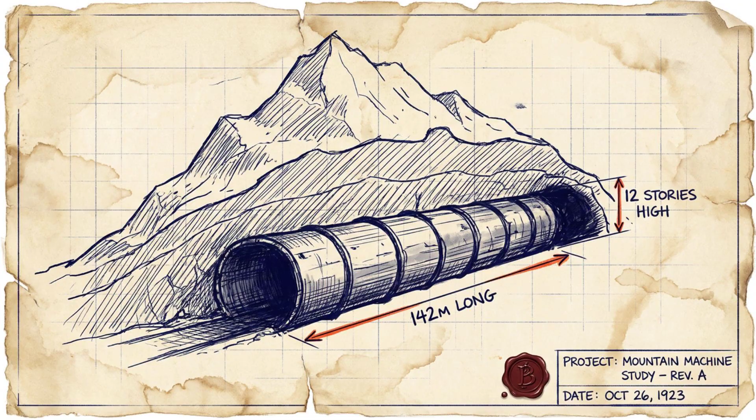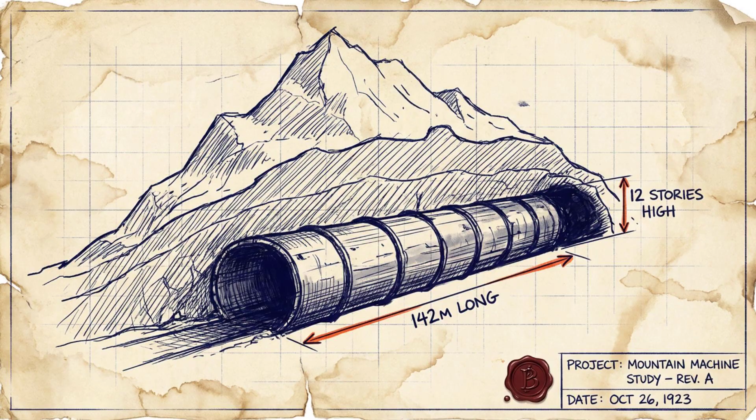Picture a machine the size of a 12-story skyscraper, laid on its side, buried under a mountain. It can't go forward, can't go backward, and it's supposed to be powering Australia's entire energy transition. That's not a hypothetical, that's what happened. This is the story of TBM Florence and the engineers who had to reinvent the Earth itself to get her back.

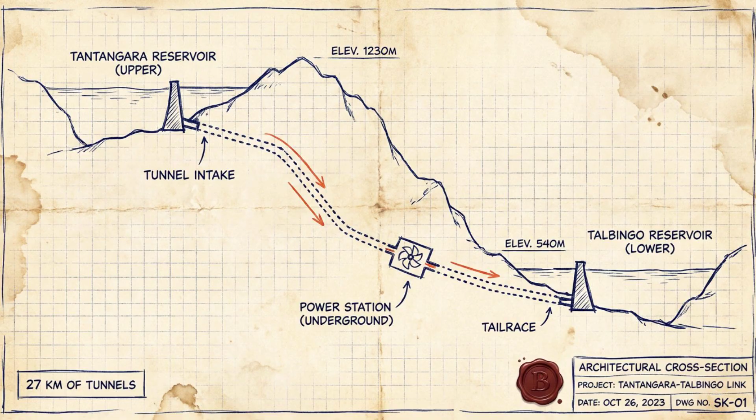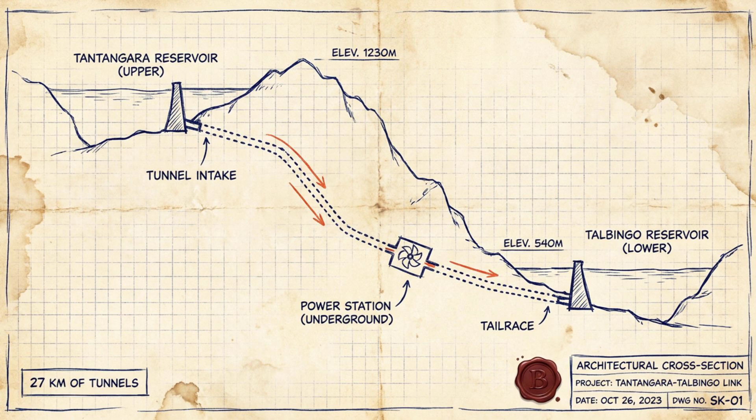The backstory first. Australia is building something that sounds almost too elegant, a gravitational battery. An actual gravitational battery. Snowy 2.0 pumps water up to an elevated reservoir when electricity is cheap, then releases it back down through turbines when the grid needs power. 27 kilometers of tunnels through the Australian Alps, enough stored energy to power 3 million homes for a week. The whole thing stands or falls on the machines that dig those tunnels.

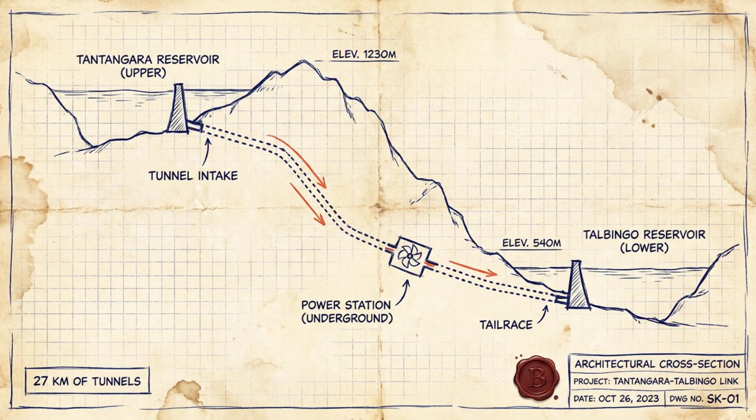And one of those machines went underground and couldn't come back. Before we go underground with Florence, we need to go back, way back, 530 years before the birth of Christ. The island of Samos, Greece. A small city is dying of thirst. Its only fresh water source is on the wrong side of a limestone mountain.

The tyrant Polycrates needs a solution. He hires an engineer, a man named Eupalinos of Megara. And Eupalinos proposes something audacious. He's going to dig a tunnel through the mountain, 1,036 meters, through solid limestone. No explosives, no powered machinery, iron picks, fire, and time.

But that's not the remarkable part. Eupalinos decides to dig from both ends at once. Two teams, opposite faces of the mountain, boring toward each other in total darkness. No GPS, no radio, no electronic surveying, just geometry and the courage to trust it.

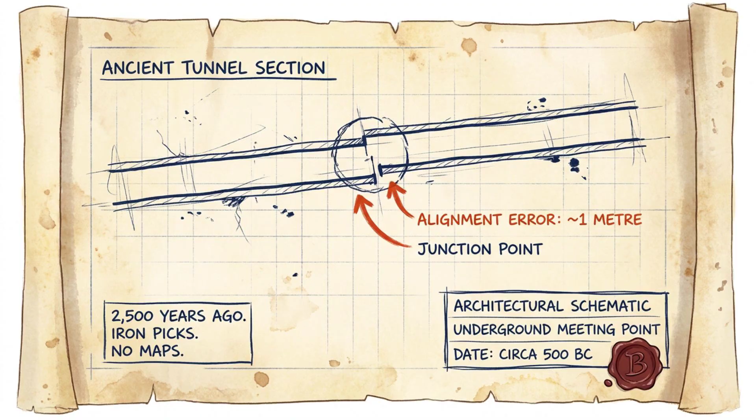Eupalinos walked equal horizontal distances around the mountain slopes, set reference markers, calculated the angles by hand, told both teams exactly where to dig. 2,500 years later, you can still walk through that tunnel. The two teams met within approximately 1 meter of each other, 1 meter of alignment error, across more than a kilometer of solid rock, with iron picks in the dark.

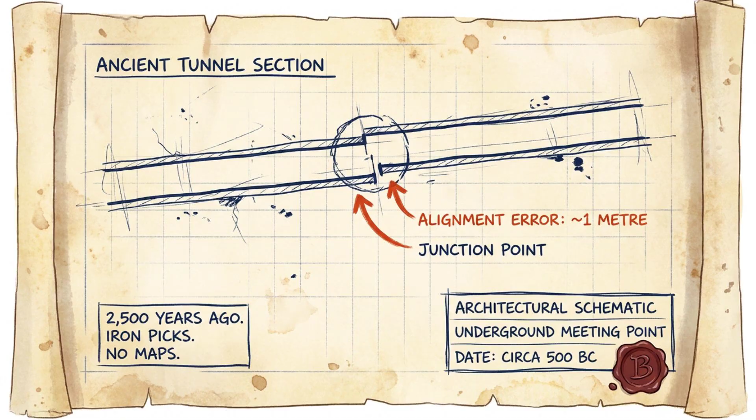That tunnel is still there today. The Eupalinos Tunnel, Samos, a UNESCO World Heritage Site, and a blueprint, literally, for what happens when you run out of options underground. There's another thing ancient miners did that gets almost no attention.

When the rock face was too hard to chip, they didn't force it. They built fires against the tunnel wall, big fires, let the rock heat through, then threw cold water on it. The thermal shock cracked the rock from within. The material itself changed, not because they overpowered it, because they altered its physical state first, then cut through.

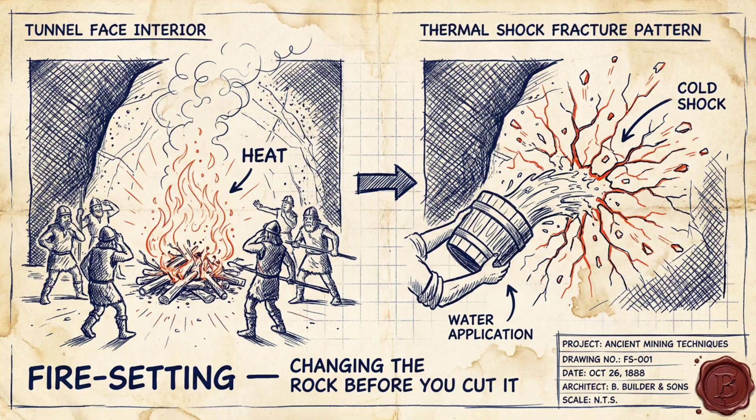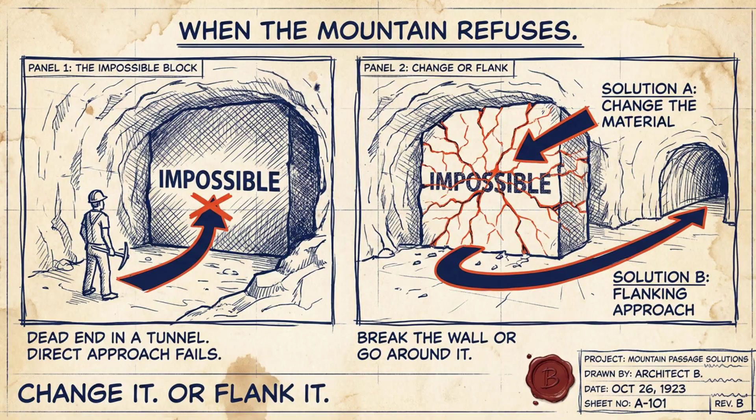That technique is at least 2,000 years old. You're about to see engineers use the exact same principle with slightly different equipment. So here's the principle at the heart of this episode. When the Earth refuses to yield, you have two choices: change the Earth first, then advance, or send the second team from the opposite direction. Eupalinos did both. 2,500 years later, engineers in the Australian Alps would face the same problem, with a machine weighing 2,000 tons and an entire country's energy grid depending on the answer.

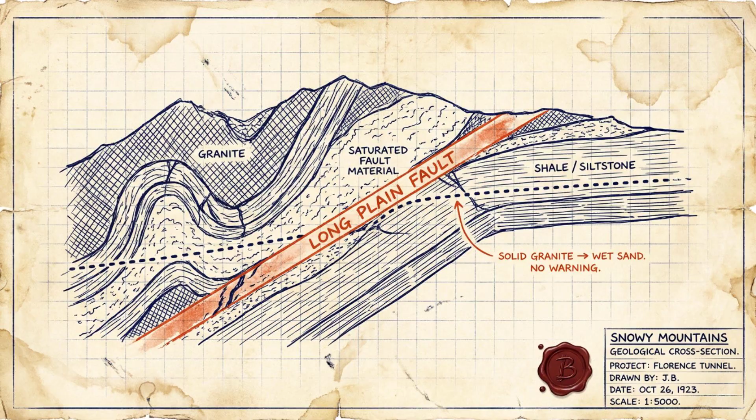The Snowy Mountains are not friendly geology. The rock under Kosciuszko National Park isn't a neat layer cake, it's chaotic. Millions of years of tectonic stress have broken it into shale, siltstone, and fractured sandstone, saturated with groundwater, compressed, folded, unpredictable. And running right through the planned tunnel route, the Long Plain Fault Zone, a geological boundary where solid granite can transition without any warning at all into something that behaves more like wet sand. The surveys didn't fully detect it. Florence would find it the hard way.

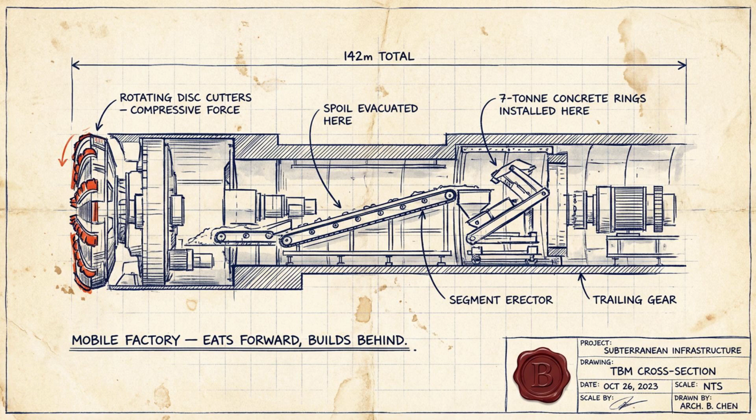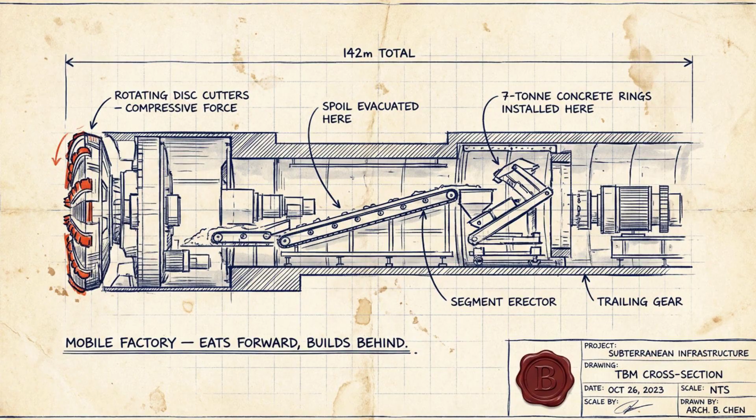To understand why that matters, you need to understand what a TBM actually is. It's not a drill, it's a self-contained mobile factory. The cutter head at the front spins and fractures the rock through sheer compressive force. Dozens of steel disc cutters, enormous hydraulic pressure. The excavated material, the spoil, gets swallowed and conveyed out the back on a continuous belt. At the same time, in the rear section of the machine, robots position the permanent tunnel lining, concrete segments, 7 tons each, 9 segments per ring. The machine eats forward and builds behind itself simultaneously.

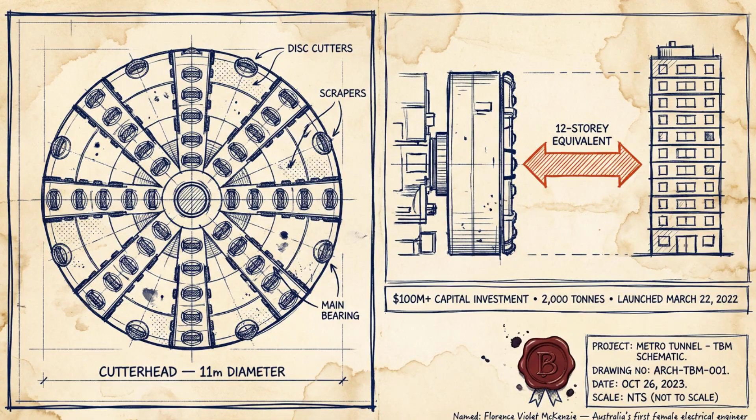Florence was designed to advance 30 to 50 meters per day. Florence herself is extraordinary, named after Florence Violet McKenzie, Australia's first female electrical engineer, 142 meters long, 11 meters in diameter. If you stood her on her cutter head, she'd be the height of a 12-story building. Over 2,000 tons of steel, hydraulics, and sensors, more than $100 million of machine. Her mission, 15 kilometers of tunnel through the heart of the Australian Alps. She launched with considerable fanfare on March 22, 2022.

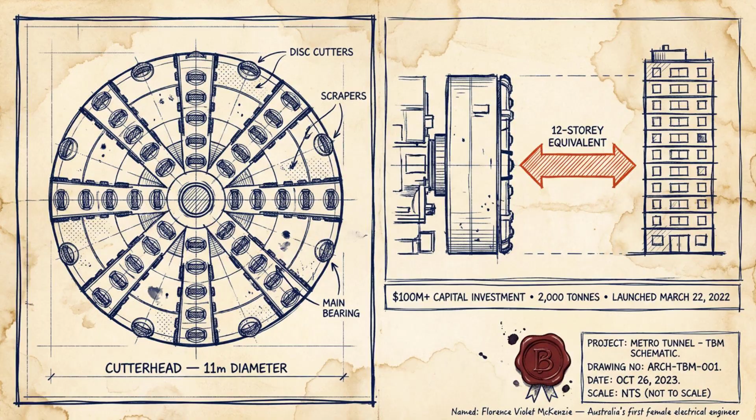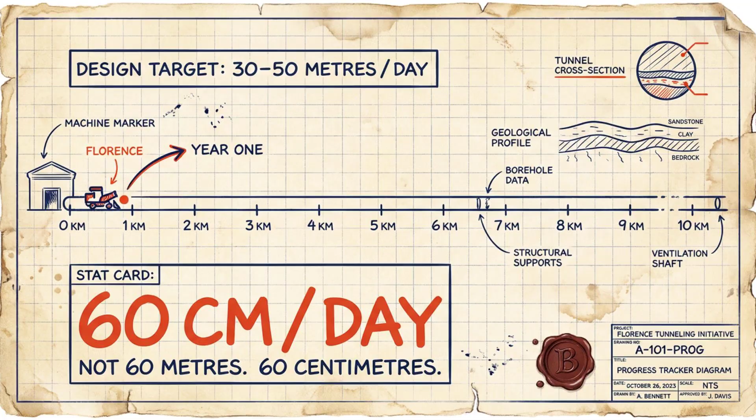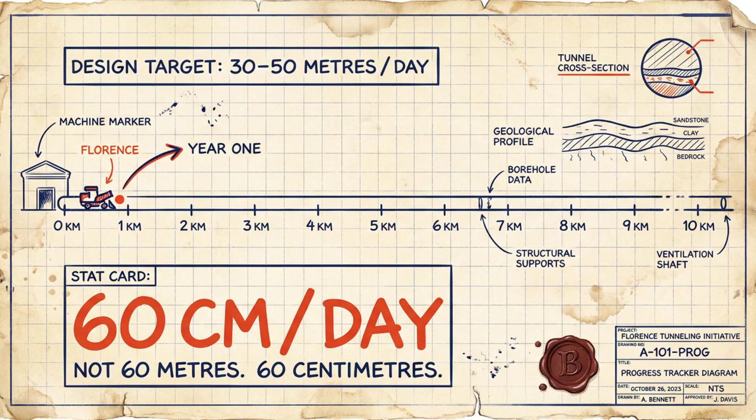Nobody was prepared for what came next. Within weeks of that launch, something was wrong. Florence was meant to advance 30 to 50 meters a day. Instead, 60 centimeters - not 60 meters, 60 centimeters - for an entire year. The long plain fault zone was far more unstable than any preliminary borehole survey had mapped. The machine was slowing to almost nothing, and the geological situation was about to get much worse.

December 2022. Florence had advanced exactly 145.8 meters into her 15-kilometer drive. That's not a typo - 145 meters out of 15,000. The ground ahead wasn't rock. It was saturated, sandy fault material under enormous hydrostatic pressure, and it was flowing into the cutter head chamber faster than Florence could manage it.

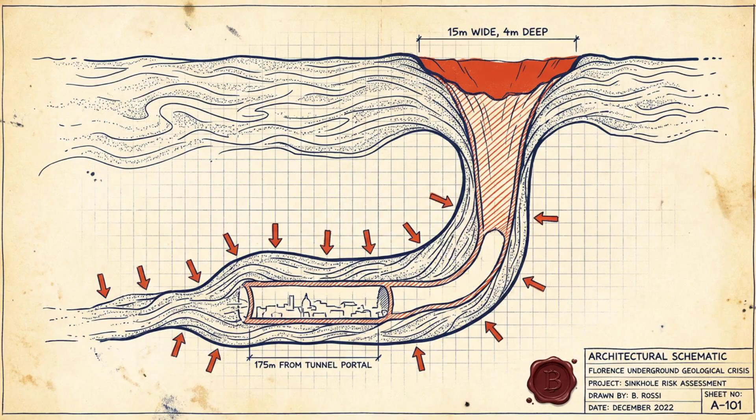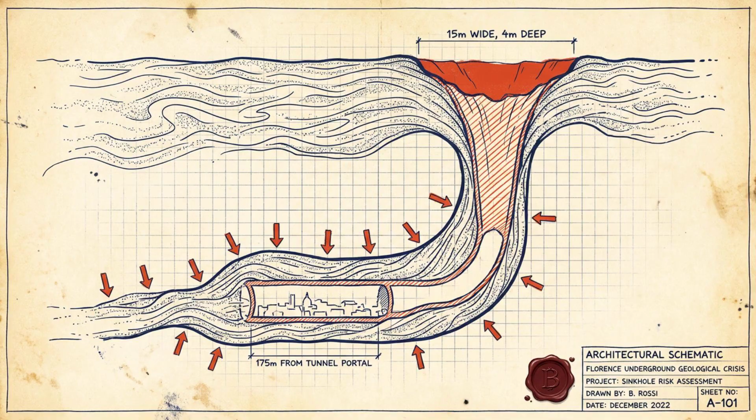The earth vacuumed upward. A 15-meter wide, 4-meter deep sinkhole opened on the surface in Kosciuszko National Park, 175 meters from where Florence had entered the mountain. Florence couldn't move, forward or back. 2,000 tons, pinned. There's no tow truck for a 2,000-ton machine buried under a mountain. Can't winch it out, can't dig down from the surface and lift it.

The saturated material had collapsed around Florence's hull. The friction alone - that soil gripping every centimeter of the outer shield - exceeded the machine's total hydraulic thrust. She couldn't push through it, couldn't reverse out of it.

For 12 months, engineers worked on the problem, and eventually they came to a conclusion that sounds like something out of a science fiction film. They couldn't fight the mountain, they had to change it.

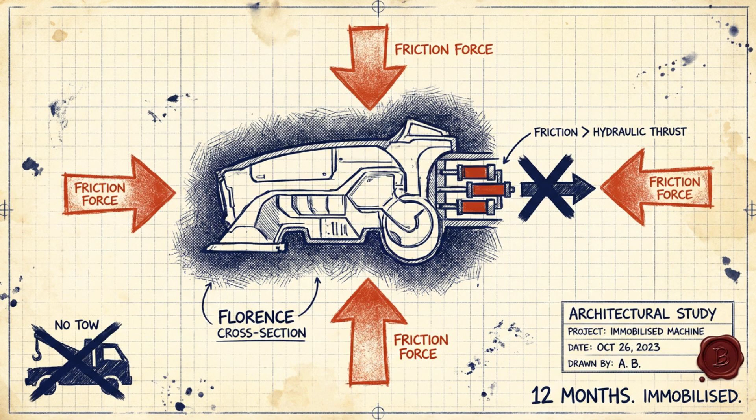What they did next is one of the most elegant engineering solutions I've come across. We're going in. This is where Eupalinos shows up again: prepare the ground first, then cut.

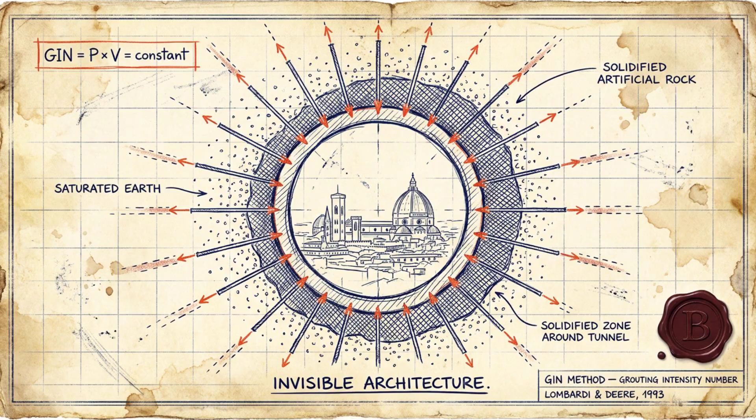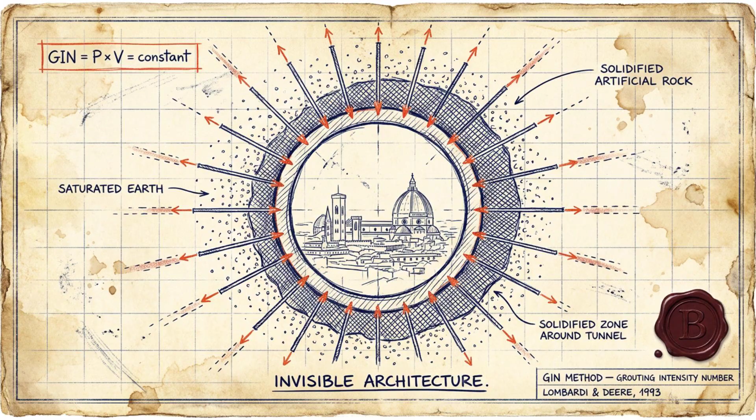Engineers deployed something called the GIN method, the grouting intensity number, developed in 1993 by geotechnical engineers Lombardi and Deere. The idea: drill injection holes around the machine and pump high-pressure liquid cement into the surrounding earth. Thousands of micro-injections, precisely controlled. The cement permeates every crack, every void, every saturated pore space. As it cures, the swamp becomes rock.

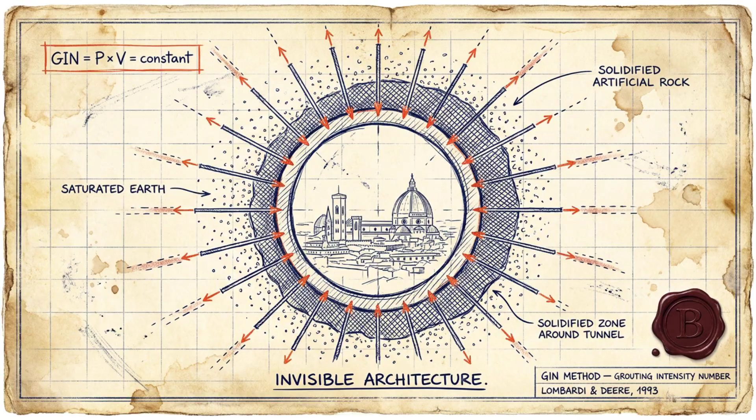Engineers were constructing a shell of artificial stone around Florence, inside a mountain. They called it invisible architecture, and that's exactly what it was. The physics had to be exactly right. Too little pressure, the cement doesn't reach the problem zones. Too much, you hydrojack the ground, violently crack open new fractures, make everything worse.

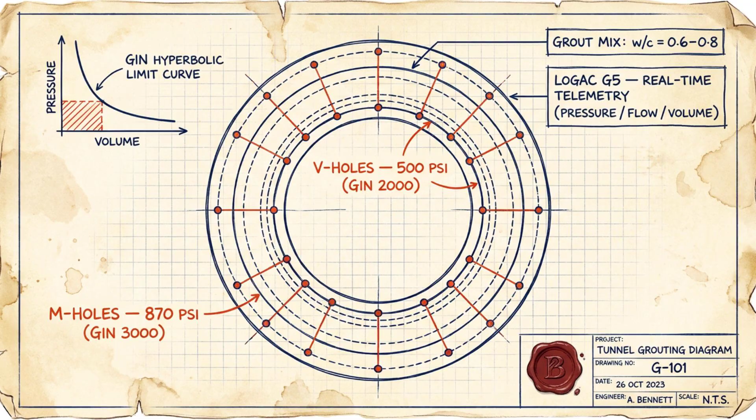The GIN method solves this with a constant mathematical product of pressure and volume injected. Two zones got different treatment: perimeter zones, the liner interface, 500 pounds per square inch; deeper mass consolidation zones, 870 pounds per square inch. One stable grout mix throughout, water to cement ratio between 0.6 and 0.8, tight enough to bond, stable enough not to segregate.

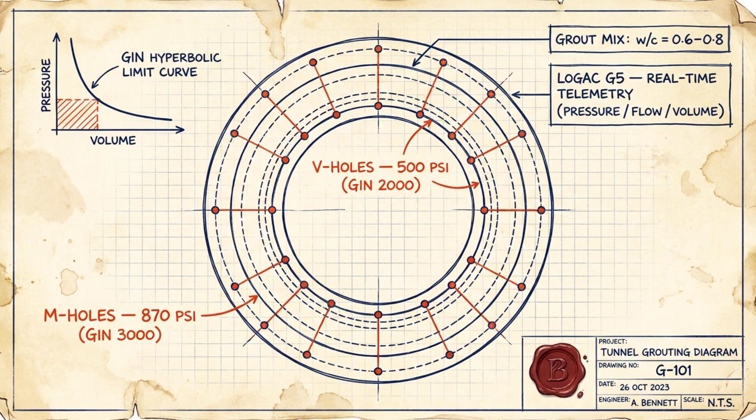Real-time monitoring from a LOGAC G5 recorder deep underground tracked pressure, flow rate, volume, penetration. The invisible architecture was being built by data as much as cement.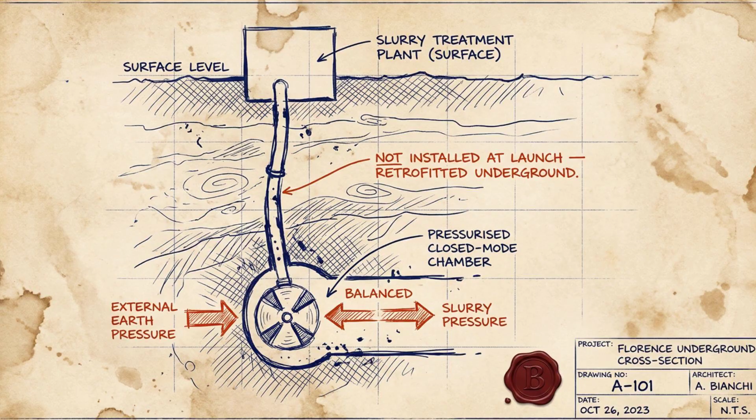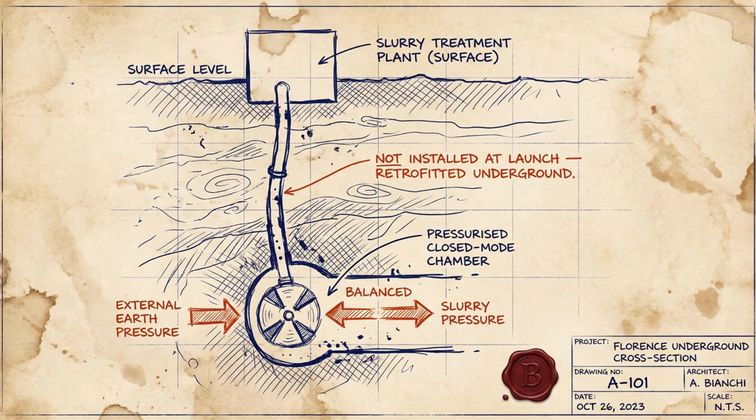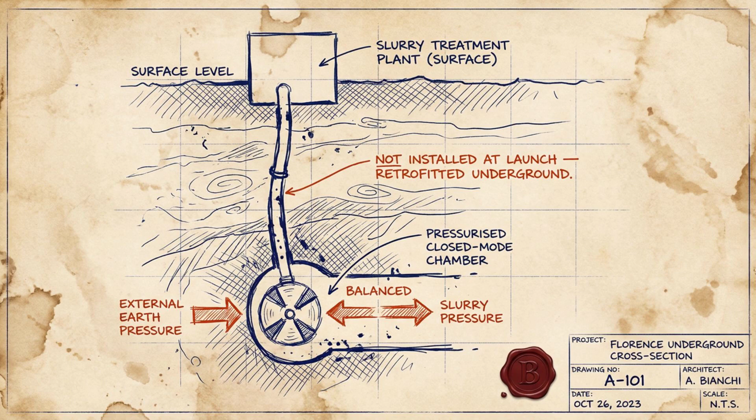But there was something that should have been caught earlier. Florence was dispatched without fully commissioned closed-mode slurry capability into geology that was known to carry unstable, water-saturated fault zones. During the rescue period, engineers had to build a new slurry treatment plant on the surface, run a feed pipe underground, and modify Florence herself. The slurry system works by pressurizing the cutter head chamber with viscous fluid matching the groundwater pressure outside - that balanced pressure stops the earth from flowing in. The modification took months on top of the grouting work, but by December 2023, Florence was ready.

December 2023, 12 months after the sinkhole, Florence takes her first step - slow, cautious, slurry mode fully engaged, but moving. The invisible architecture held. The engineers had changed the earth, and the earth obeyed. For a moment, it felt like the worst was over.

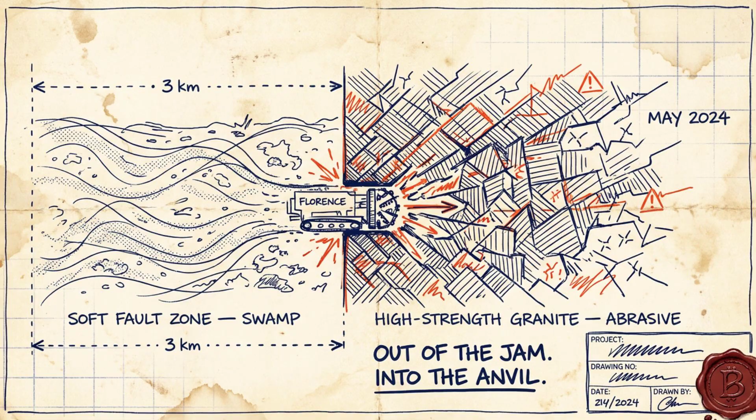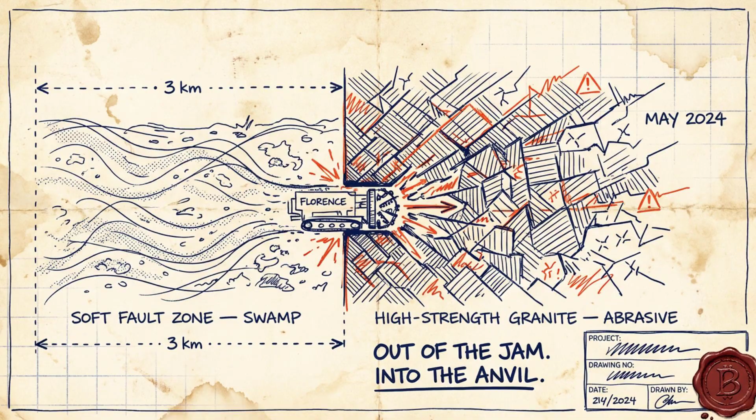By mid-2024, Florence had ground her way to 3 kilometers - 3 kilometers of slow, claustrophobic progress through the fault zone. Then the geology swung the other direction completely. Instead of saturated sandy ground, Florence drove into rock that was the opposite extreme: hard, aggressively abrasive, high-strength granite.

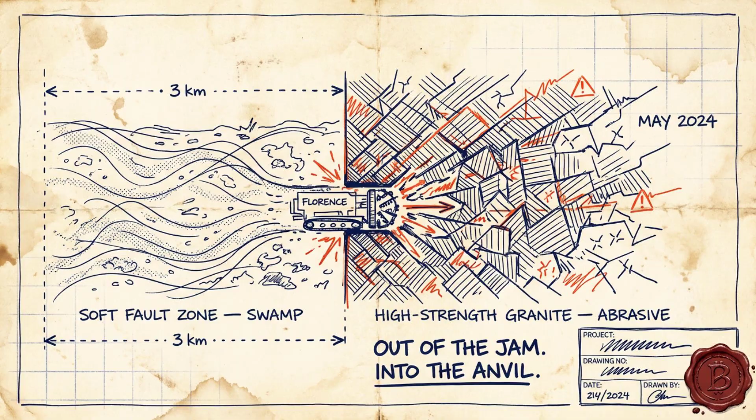And at exactly this point in the tunnel, the alignment required Florence to navigate a curve. Abrasive rock plus a tight curve plus immense hydraulic thrust - the rock began to clamp onto Florence's outer shield. May 15th, 2024. Total halt. Again. Here's the problem with the hard rock jam.

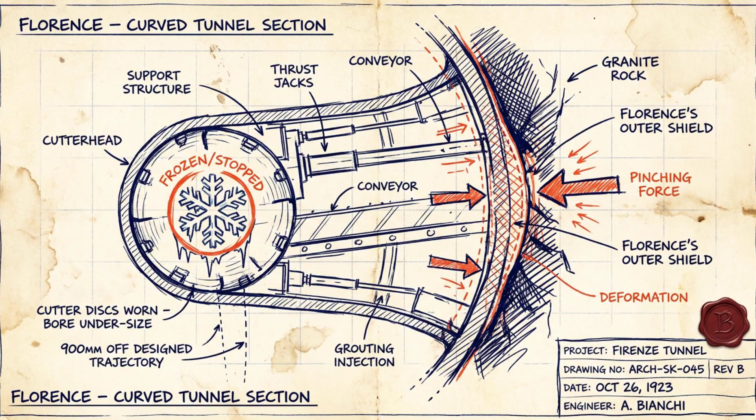The jam method can't help against solid granite. You can't inject cement into dense rock. Compounding things, the worn cutter disc had degraded the bore to a slightly smaller diameter than designed. The 7-ton concrete lining segments no longer fit correctly. Under the operational pressure to recover lost time, Florence had been driven approximately 900 millimeters off her design trajectory before she seized entirely. The rock was physically impinging on the outer shield.

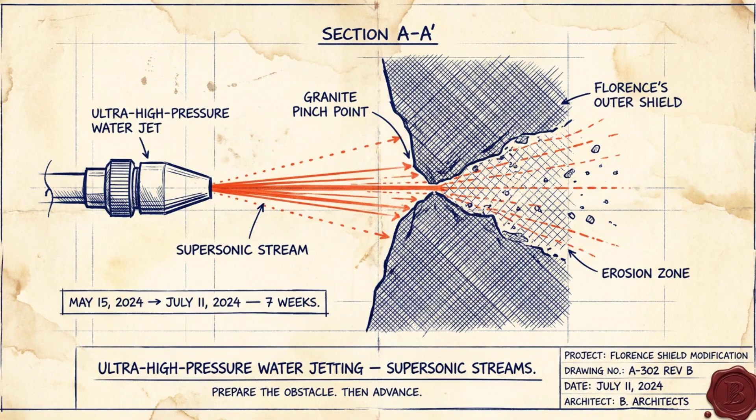It had to be removed without the cutter head, which was frozen, without damaging the hull. Millimeter by millimeter, specialist contractors deployed ultra-high pressure water jetting, hydroblasting, supersonic streams of water precisely targeted at the pinch points around the shield, not cracking the granite, dissolving it particle by particle. The same underlying principle as the ancient fire setter: you don't overpower the obstacle, you change its state, then you advance. Seven weeks of that process.

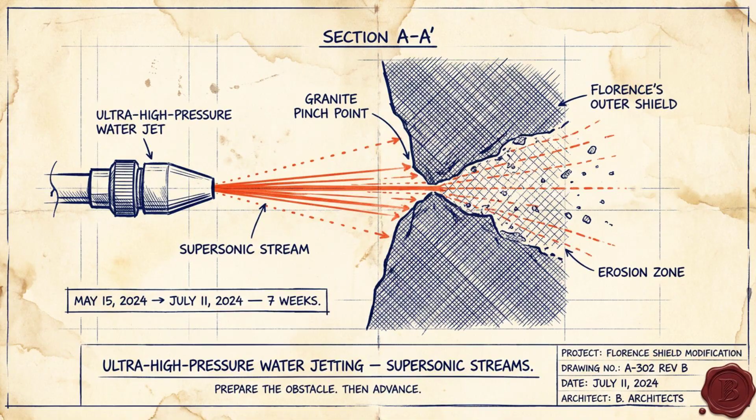July 11th, 2024. Florence could move again, freed twice, by changing the earth rather than fighting it.

None of this happened in a clean engineering lab. Hundreds of workers were in that tunnel. After the chemical grouting rescue, toxic gas leaks were reported inside the tunnel network in July 2023, the chemical byproducts of the stabilization work accumulating in a poorly ventilated confined space. In early 2024, workers stopped underground operations entirely. The reason? Emergency refuge chambers, the fortified containers designed to keep workers alive during a tunnel collapse, were allegedly not maintained to manufacturer specification. Evacuation drills hadn't been conducted in months.

When the race to catch up on lost time starts compromising the emergency systems, someone has to stop the clock. The workers did. The money.

When the Turnbull government announced Snowy 2.0 in 2017, the price was $2 billion. By the time construction was formally contracted in 2018, $5.1 billion. After Florence's first 12-month paralysis in 2023, Snowy Hydro reset the budget to $12 billion. New completion target: December 2028.

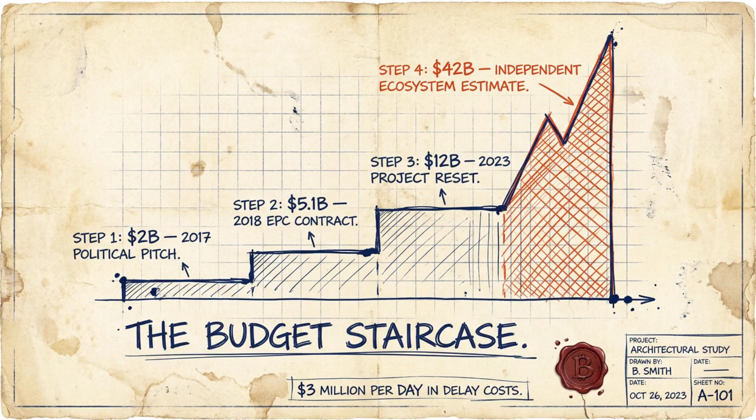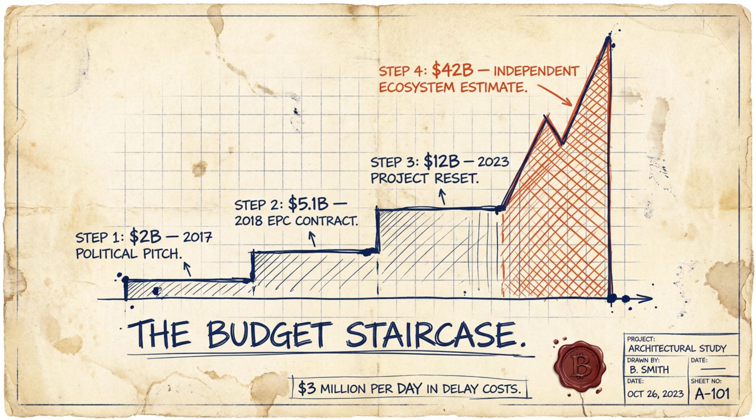Their figure: $42 billion. Every day of delay on Snowy 2.0 costs approximately $3 million in interest and holding costs. Florence's 12-month paralysis, an estimated $150 million in direct rescue costs alone. The indirect costs, measured in billions.

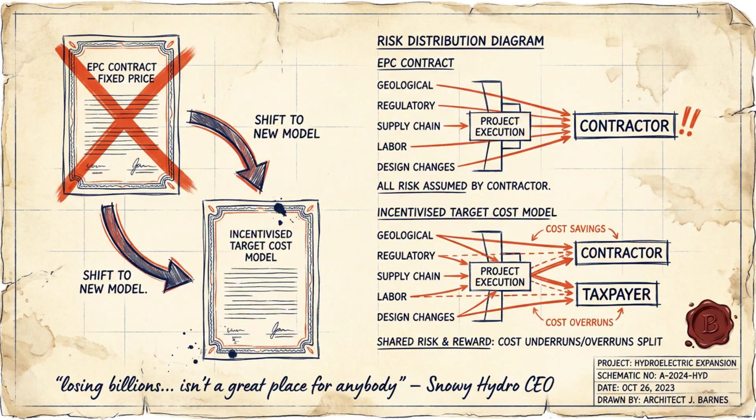There's a contracts lesson in all of this. Snowy 2.0 launched on a fixed-price EPC contract: engineer, procure, and construct. The theory is clean. The contractor takes all the geological risk. If the ground fights back, that's their problem. Except when the losses become large enough to bankrupt the contractor, there's no one left to finish the tunnel.

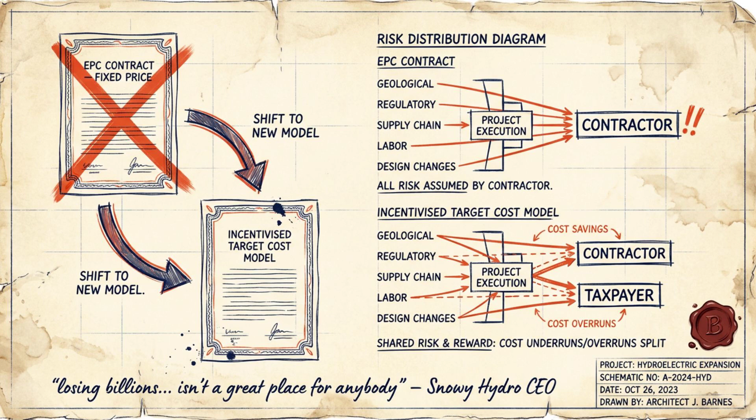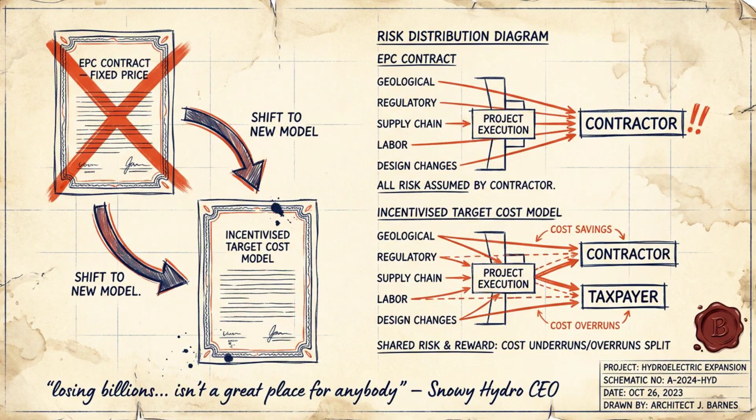In 2023, the structure collapsed. A new incentivized target cost model replaced it. The geological risk came back to the taxpayer. Snowy Hydro's own CEO acknowledged, having your primary contractor losing billions of dollars isn't a great place for anybody. That might be the most understated sentence in the history of megaproject finance. When the mountain fights back hard enough, the public always ends up holding the cost.

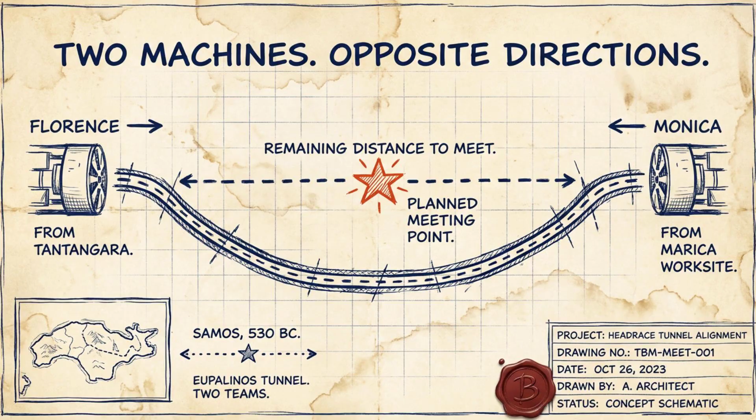And so we arrive back at Eupalinos. One direction of attack isn't enough. In late 2024, the Australian government approved $75 million to procure a fourth TBM, named Monica, 178 meters long, 11.86 meters in diameter, shipped from Guangzhou, China. Monica's mission? Enter the head race tunnel from the opposite end, dig toward Florence. Two machines, opposite directions, both navigating the same hostile geology, meeting underground.

Sound familiar? It's exactly what Eupalinos did on Samos in 530 BC, the oldest tunneling solution in the book. When one attack fails, open a second front.

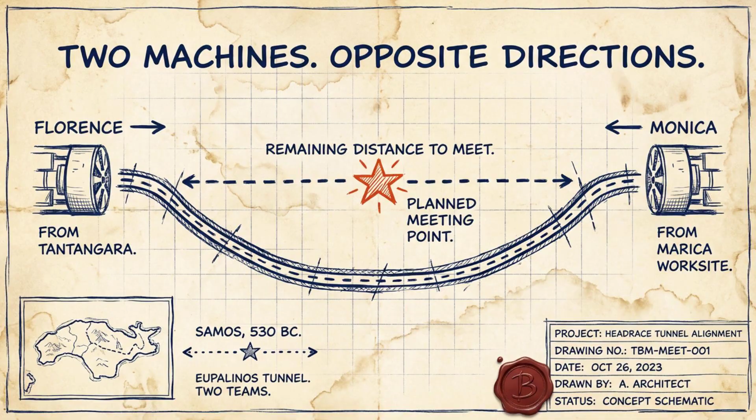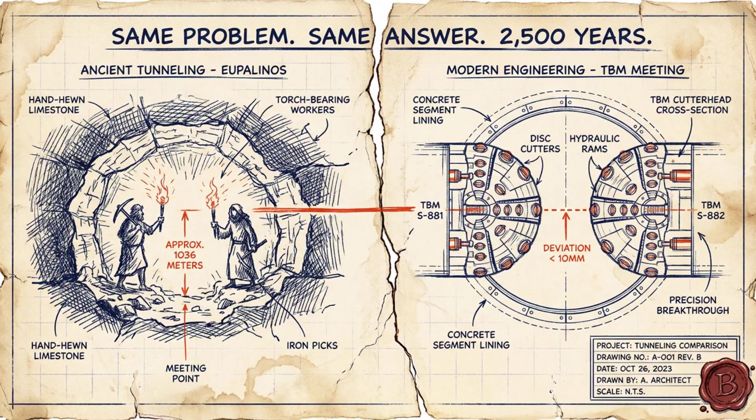Here's what the Florence saga actually tells us, not just about tunneling, but about the relationship between human ambition and geological reality. The mountain doesn't negotiate. It doesn't care about political announcements or contractual deadlines. The geology is what it is. And when the gap between the model and the reality becomes catastrophic underground, the options available to engineers haven't fundamentally changed in 2,500 years.

Change the obstacle first, or attack from two directions. The engineers who rescued Florence didn't invent anything new. They remembered something very old. That's the pattern. That's the echo.

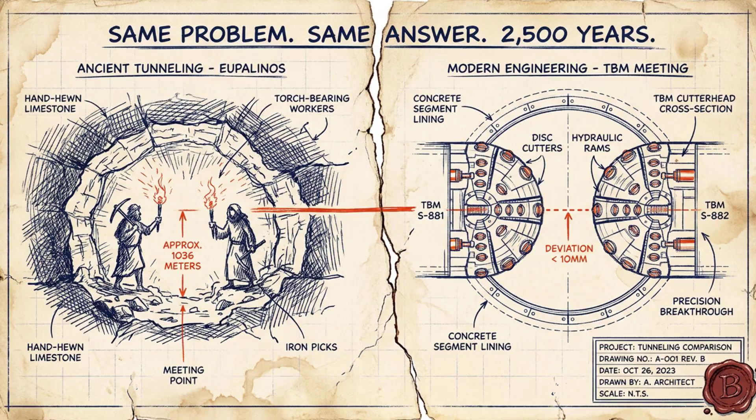As of now, S&P has warned of a potential credit downgrade for Snowy Hydro. The $12 billion official budget is projected to be exhausted before the 2028 completion date. In 2024, the federal government injected $7.1 billion just to keep the project alive.

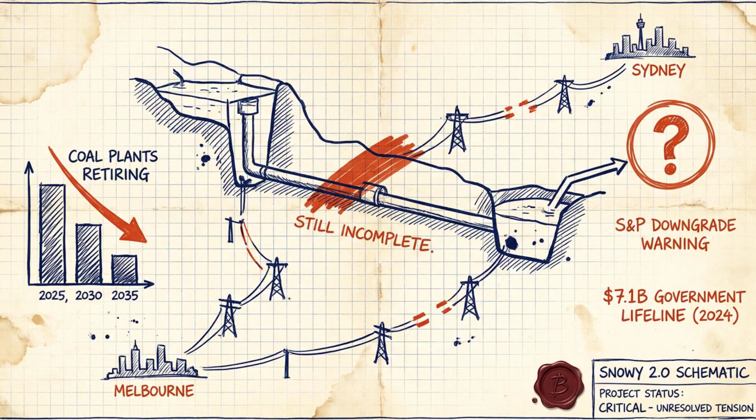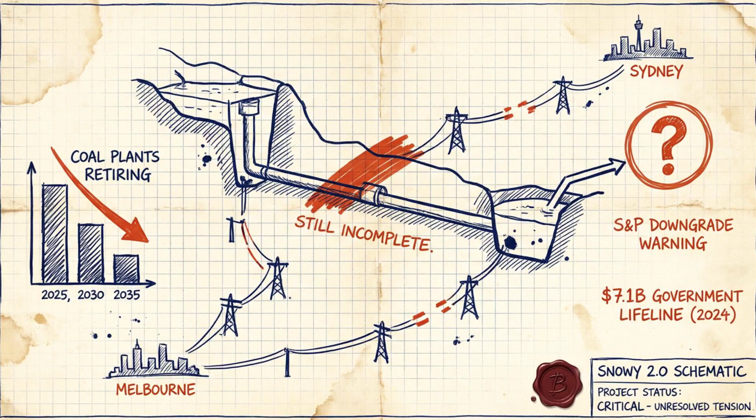Florence is moving again, slowly. Monica is approaching from the opposite direction. Two machines in the dark, boring toward each other through the same mountain. Same as Samos, different century. When they meet in the middle, Australia gets its battery.